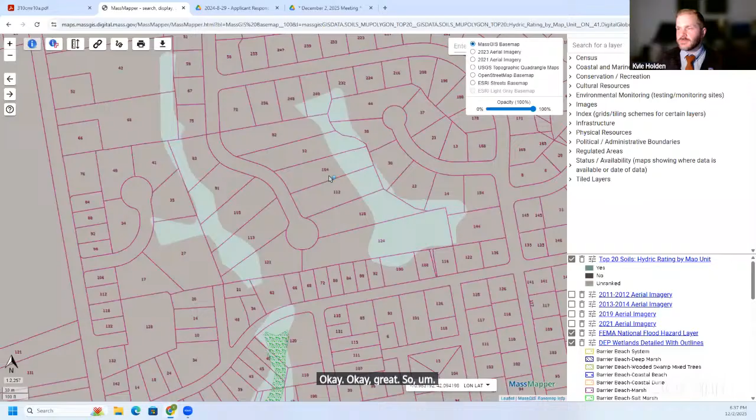I'm going to share my screen. This is for the notice of intent application for the subdivision as a whole, rather than each individual lot, but it does show the lot lines, roughly where the road is, and most importantly for us, where the wetlands are. Does this map show the MassMapper map? That is MassMapper, yeah. Okay, great. So this kind of shows broadly where we're dealing with.

Initially, we're looking at this entire lot as the lot that's being developed. Several individual lots now, but it was one large wooded area to begin with. These blue areas are roughly where the wetlands have been delineated. There's one wetland system that goes up north-south through this way, and a second wetland system over on the east side of the whole larger lot.

The fences have been installed on 91, 105 Debbie Road at least. The concern is the fencing that was installed is a solid vinyl fence that does not allow wildlife to potentially traverse through the fence line.

My concern and what I'd like the commission to weigh in on is we have - I'm going to switch back to the plan set now - the wetland system here to the left, and then the one all the way over to the east, and then all these homes that are going to be built up in between.

The concern is if we have fences similar to the ones currently installed at these 2 lots, all the way down through this area, any wildlife in this protected wooded area won't have a mechanism to get over to this area, and that will impact what types of critters can even survive and reproduce and thrive in these areas. One of the interests the commission is tasked with protecting is protection of wildlife habitat. That's just definitionally in the act.

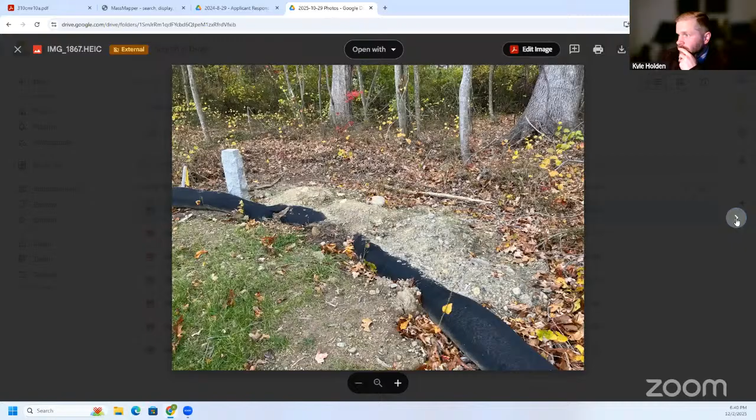The fencing that's within the buffer zone is within the jurisdiction of the commission, and the commission can weigh in on what they think is appropriate. That's kind of where I'll leave it open for discussion.

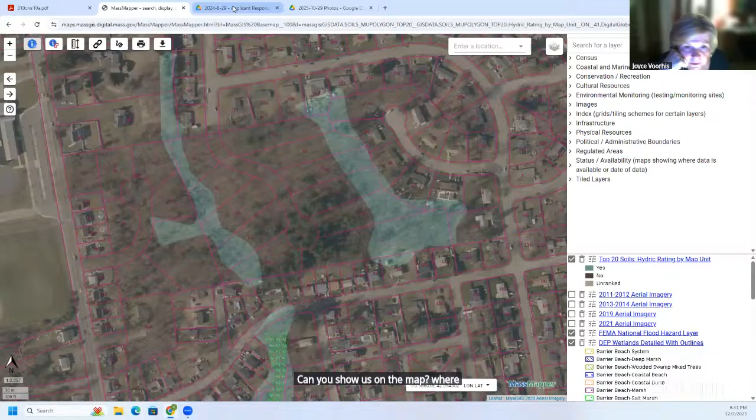I can share some more photos, but again, Commissioner Voorhis, Talbot, and Matt have been out in person at this site. Can you show us on the map where the fence goes? How deeply into the buffer zone does the fence go?

It's kind of hard to say because we don't have an as-built that includes the fence for any of these. I think we were looking at this home here and this home. So really, the back of the fence would definitely be within the buffer zone. A lot of these homes are far enough away that any fencing near the road or near the home itself is kind of outside of the commission's jurisdiction.

So there is limited capacity here, but at minimum the commission needs to weigh in on whether these fences are fine, because they weren't included in that notice of intent submission originally, but they're there now and they're asking for these certificates of compliance, or they ultimately will be. So before they construct fencing along the entire subdivision, I thought we should have this discussion, so we can give some guidance to the developer on what we're looking for here.

So the first lot had that fence. It didn't close out the back of the yard because there's not much backyard outside of the 25-foot buffer zone here. It went along this property line and then connected to the home. But then this home decided to build a fence—there's one along the property line here, and one along the property line here. That closes up by the home, and then there's that chain link fence across the back.

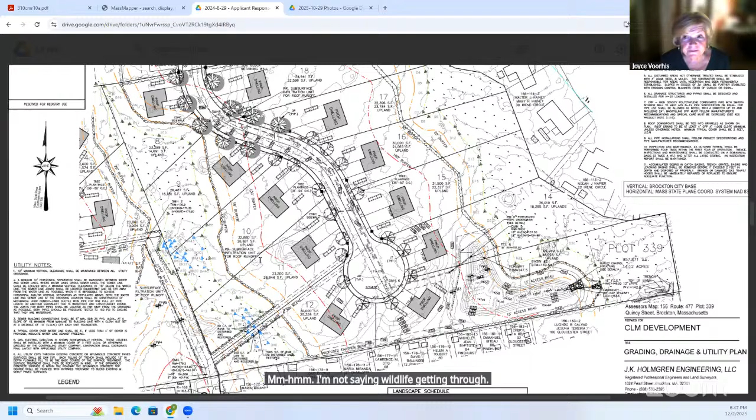I'm not seeing wildlife getting through those privacy fences if they're boxed in the front and on all sides at all. Madam Chair, may I ask a question to piggyback off of Peggy and Kyle? You can help too. The non-jurisdictional properties, they can put a fence up and close in their front, correct?

There may be other issues with that, like zoning concerns, or building code might dictate how high the fence can be. But as far as the commission's concerned, if it's outside of our jurisdiction, not within the 100-foot buffer zone, and it meets other standards for building within the city, they can do whatever they want.

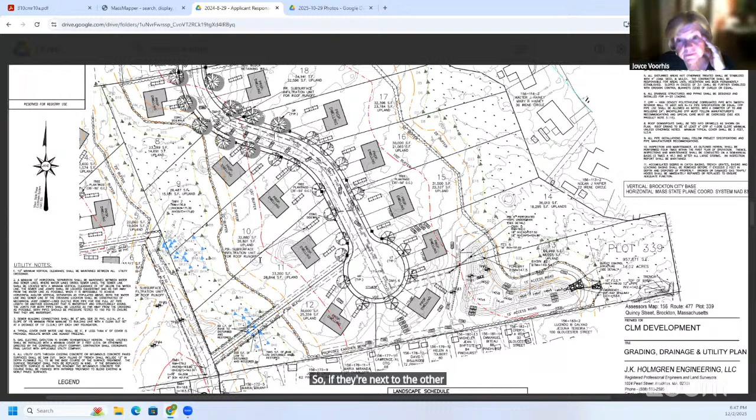So if they're next to the other wetland but not close enough to that wetland, outside of that 100 foot, they can put anything up that they want, even if it's going to box in the wildlife coming from the other side.

Yeah, so let's look at this lot, lot 17. I'm not sure what the street address is. This is one where we did not have an individual notice of intent for the construction of the home, because all of the construction associated with the home is outside of that 100-foot buffer zone, which is this red line back here. They could put a vinyl fence along this 100 foot and basically be outside of our jurisdiction. We couldn't weigh in on that at all.

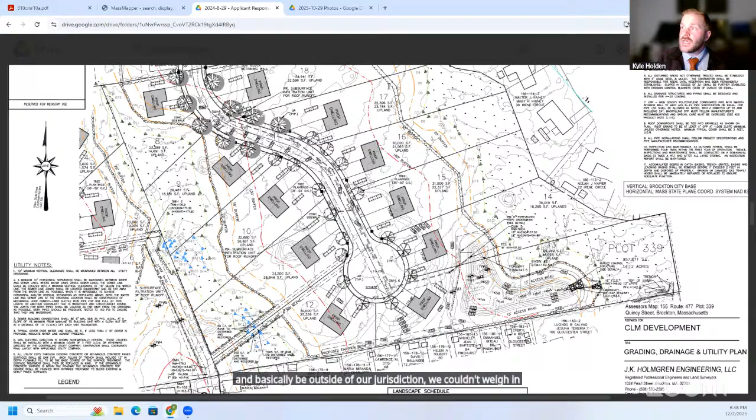But if they wanted to go all the way back to where the lot was cleared, which is close to where the 50-foot is, and it's something beyond like a post and rail fence, they would have to file with the commission in some way.

Which is why I think a development-wide fencing protocol makes so much more sense. I don't know, but whatever.

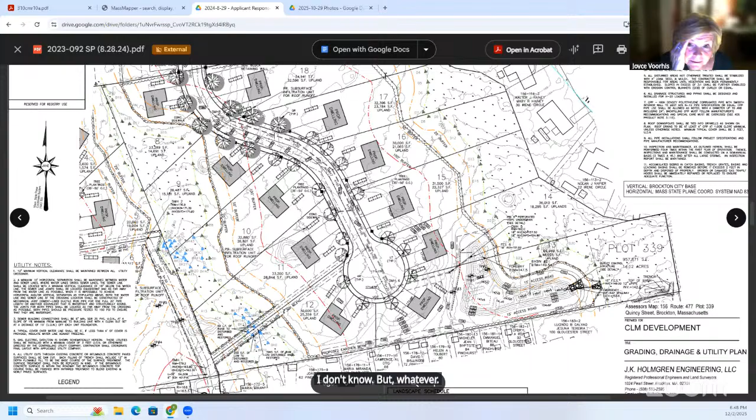So Justin, what do you think about that? Well, that was where I was going. Excuse me, Madam Chair, like Sharifa said, if we can't do anything with that, at least we could do a post and rail in the back that gives access out, not across.

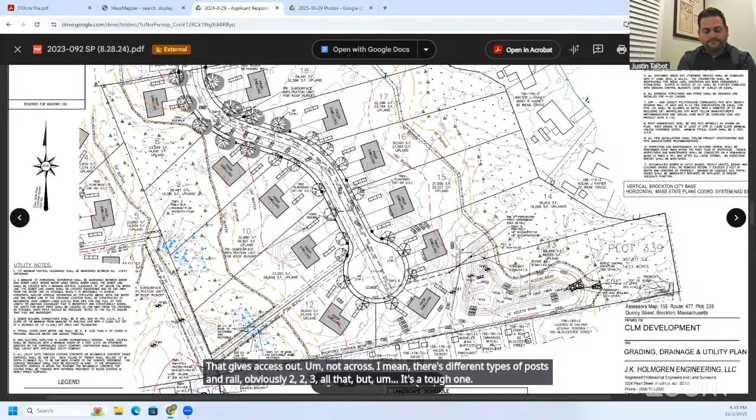There's different types of post and rail, two, three rail, all that, but it's a tough one. I wonder if we could do post and rail back and front. But we couldn't do the front because that's beyond the 100 foot. We could request that they put a post and rail fence in the front if it's outside the jurisdiction, explaining the commission's reasoning for that.

But there's no enforcement. Yeah, because it does say a barrier to wildlife movement is a critical requirement. The fence design cannot create a solid barrier that prevents animals, from rabbits to deer, from moving freely through the landscape. That's just to qualify as a minor exempt activity, which wouldn't need the commission's review. The commission can absolutely permit a solid vinyl fence within a buffer zone, but that needs to come before the commission. The commission needs to weigh in on that one way or the other.

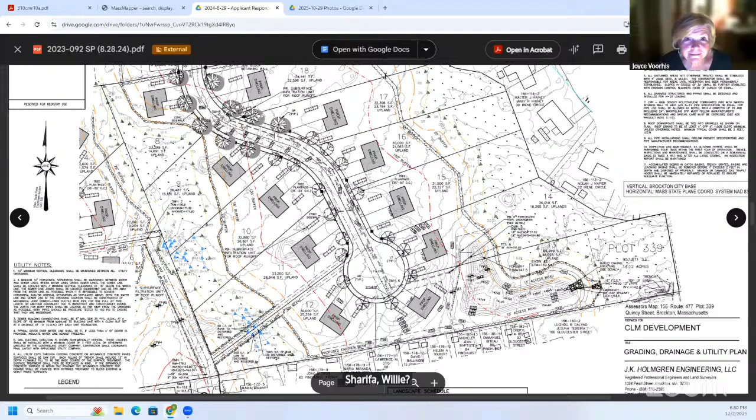Commissioners? Sharifa, Lily, Peggy? Yeah, I'm not sure. Outside of the split rail, that's the only thing I could suggest.

Yeah, but it again sounds... go ahead Lily, sorry. No, sorry. I was just gonna say it sounds like from what we have jurisdiction over, especially the back part of it closer to the wetland line, sounds like we should decide on that, and we could do what Kyle suggested, ask them if they are willing to change the front ones to post and rail, but we can't enforce it, we can at least ask. But we can enforce the one close to the wetland line.

So I think we should decide if that's what we want to do, that if they want to put a fence in the back part closer to the wetland line, it be a fence like a post and rail or something that's not going to impede wildlife. With the understanding though that wildlife need to have movement from one wetland resource area to the other, right? So yeah, kind of need it both front and back throughout the subdivision.

We can do our best to explain that reasoning and why we're making the request for the front fence, but like I said, it's not in our jurisdiction, but we can do our best to explain to them why. Maybe if we can explain it in a good way, maybe they'll understand and change it. But they might decide to change it, but who knows, the next owner that lives with it might decide to rip it up and put in a vinyl deer fence around their hostas. Yeah.

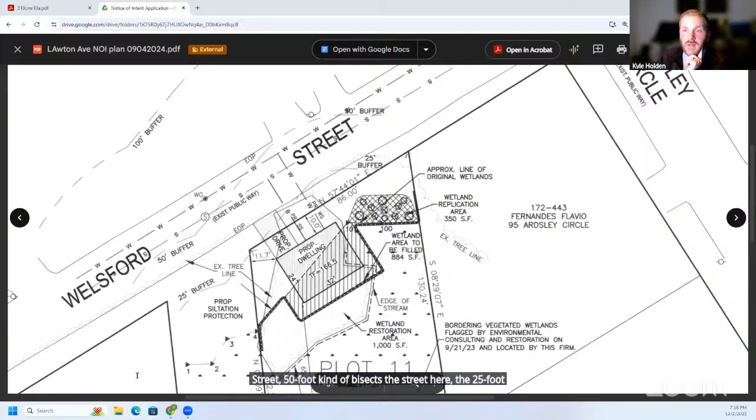I want to kind of refocus, and I think, if you'll give me a moment here. I would appreciate that very much. So Glenn, I appreciate you kind of talking through that proposal. That was not really what I thought we were going to be discussing here, what the ask of the commission was going to be tonight.

Based upon our previous discussion, I thought we were talking about basically the May clause and whether or not this project is something that the commission will ultimately approve, or if it's not worth going through this back and forth between yourself, the engineering firm, and our consultant, PARE Corp, in developing something that meets the standards, if ultimately the commission's not interested in permitting something that has the footprint of the building within like 3 feet or whatever of where the wetland restored line would be.

The proposal that you're talking about, and please correct me if I'm wrong, Glenn, is a way to augment, mitigate the existing habitat of the wetland that's been impacted by the fill. And as you mentioned before, kind of in this area to the north of the plot text between that and the area that's filled, Glenn's talking about excavating more material out of here, and I think creating a deeper kind of pool in this region. Is that correct, Glenn?

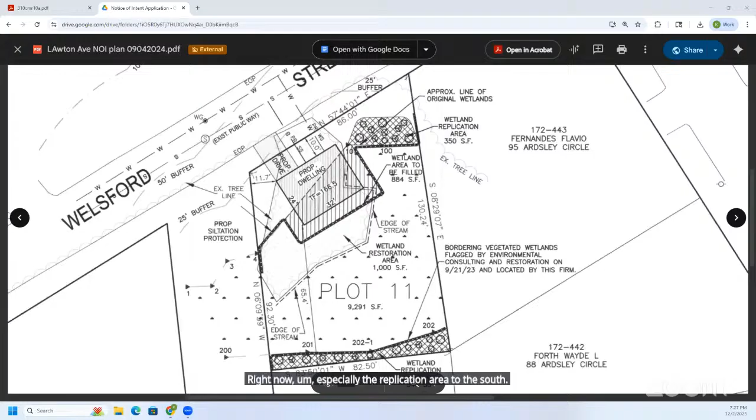Moving on from that, I think the replication areas -- I have some concerns over the constructability of what is shown right now, especially the replication area to the south. There's no construction access currently shown. The two options I see are through the neighbor's yard or through the right of way, both of which are limited for different reasons.

For the neighbor's yard, they would have to sign on to the notice of intent, and the applicant would have to get permission from them to access that wetland replication area. If they go through the right of way, there will be additional impacts to the BVW that aren't shown here, requiring further restoration work just to access this replication area in order to construct it.

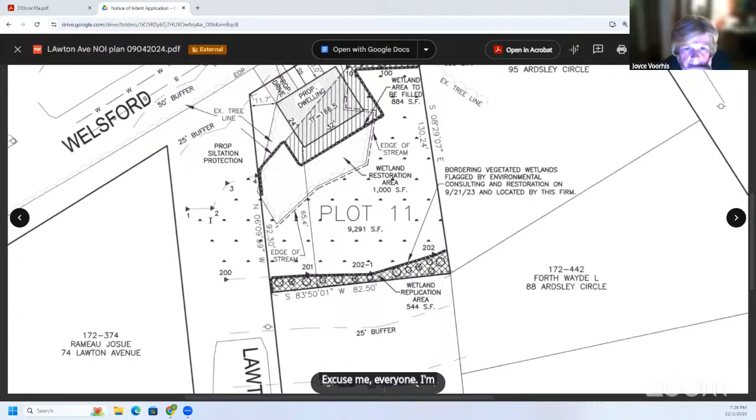One second, Kyle -- can you show on the map where the right of way would be? The right of way is this street-looking area, running through the wetland Greg's referencing. It's kind of cut off here, but this is 79 Lawton Avenue. There's a home constructed on this lot, and their yard basically goes up to the lot line here. Then there's a fence, and then a pretty steep drop off into the wetland area back here.

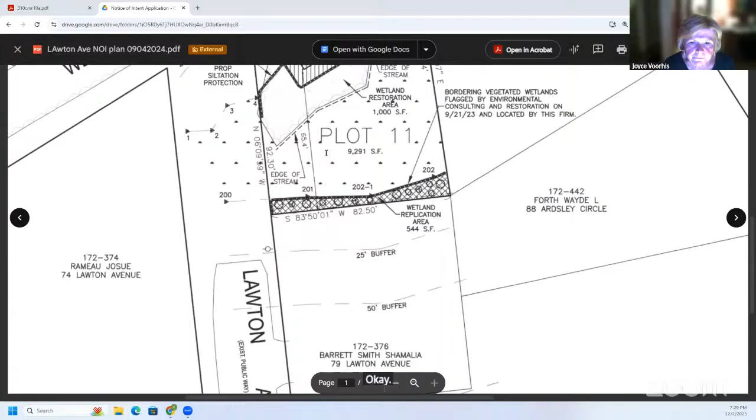Okay, thank you. That gets into my other concern about constructability. The wetland is probably a few feet lower than the adjacent yard area. So if they're going to do any sort of slope down from that yard to the wetland as a side slope to get down to the replication area, it's likely going to take up most of the width of that replication area.

Generally, slopes for replication areas shouldn't be much higher than 3-to-1. So just so the commission understands, that means 3 feet out for every 1 foot drop -- to get down 2 feet, you have to fill in 6 feet. So it quickly becomes a much smaller replication area, which is my point I'm trying to lay out to you.

I think a thorough cross section and summary on constructability of that replication area would be very beneficial for my review, and for the commission's review as well, just to see if it is constructible at all.

Because if they can't replicate in that area, the whole project, outside of other potential mitigation opportunities, becomes questionable quickly -- because no matter what other kind of mitigation work you do, you have to replicate 1-for-1 for lost wetland. There cannot be a reduction in BVW on site. So those are two of my bigger concerns.

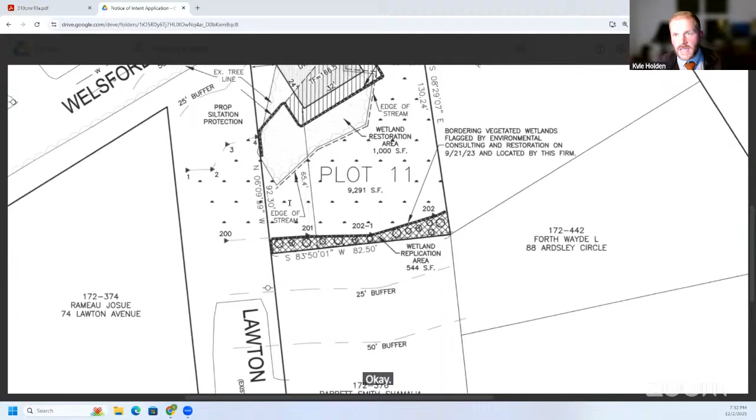That's great, that's great. Thank you so much. Thank you. Thank you. Thank you.

Glenn Kowalski, one point, if I could, through the chairwoman. We will ask JK to give us accurate topo on this plan, if we can get that prior to the meeting, just to make it clearer on the steep slope, as the consultant was just mentioning, across the wetland.

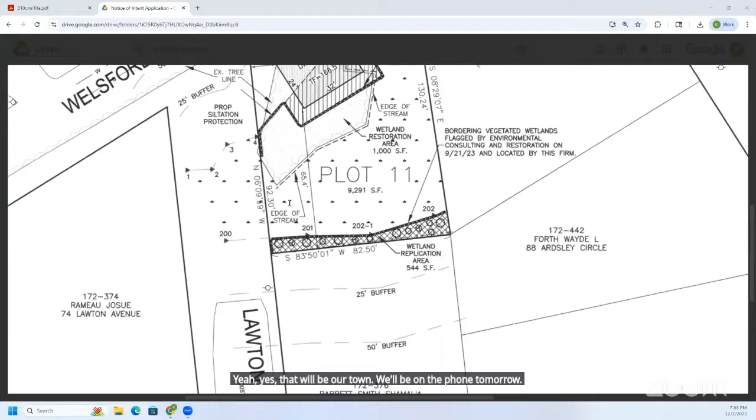To our being able to get to the visit, you mean? Prior to yes, that will be our attempt. We'll be on the phone tomorrow. We'll be on emails tomorrow to see if we can get the topo dropped onto this thing. That would be great, thank you. Okay, thank you.

Okay, so then I assume we need a motion to continue? We request a continuance from this side. Thank you.

I make a motion to continue this to 0 Lawton Avenue to the December 17th meeting. I'll second that. Motion's been made and seconded. Roll call vote, please.

Green, aye. Matt, aye. Excuse me, Talbot, aye. And Voorhis, aye. Peggy, are you available? Well, four - we still have quorum, right? Yeah, I think that'll be fine, Madam Chair. Okay, thank you. We'll say Peggy abstained. Okay, and that motion carries.

Okay, that was interesting. Thank you very much. Appreciate your time. Thank you.

Bye-bye. Okay, next on the agenda is number 11985 Belmont Street Car Wash. This is a notice of intent, right? Yes, Madam Chair.

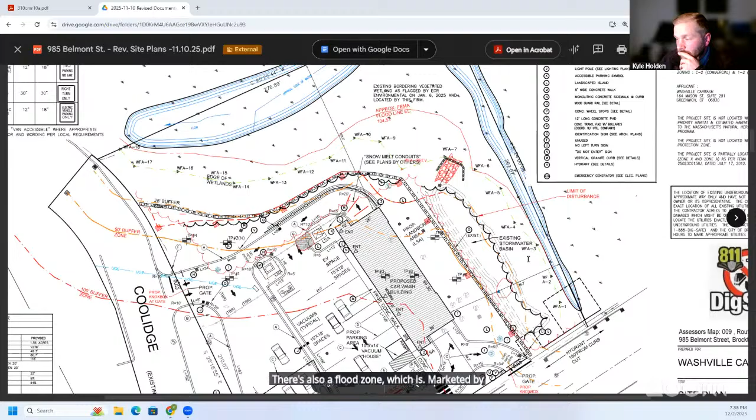I just have a couple questions, and either Spencer or Scott can chime in as we go through here. So what are these thatched square icons along, not necessarily the limit of work, but the erosion control barrier through this area? So Kyle, those represent symbols for conservation posts, for lack of a better term. For all limit of work posts. Great, thank you.

I know that there's been some conversation amongst Brockton as to what you were requiring prior to tonight. I'd like to suggest, if I could, other towns like Easton, for instance, and I believe Stoughton's another good example, but Easton requires that you put up 4x4 posts with a medallion on it. So there are other things that other towns in the surrounding areas use that are a lot cheaper than granite posts, which I think was something that was installed on that Charlie Macy subdivision that came up earlier in the evening tonight.

So just to kind of jump in there, Scott. Yep. The commission is looking at these on a site-by-site basis, right? So the concern of encroachment in a commercial facility like this is a lot less than that of a residential area, where people are mowing an extra foot into the wooded area every year, and then 5 years later we're right into the wetland. So I think the commission could certainly, we've done for another car wash development over at 710 Oak Street, something very similar, a little placard with just a kind of stainless steel pole there, and I think something like that would be appropriate for this as well, rather than the granite curb or the granite signposts.

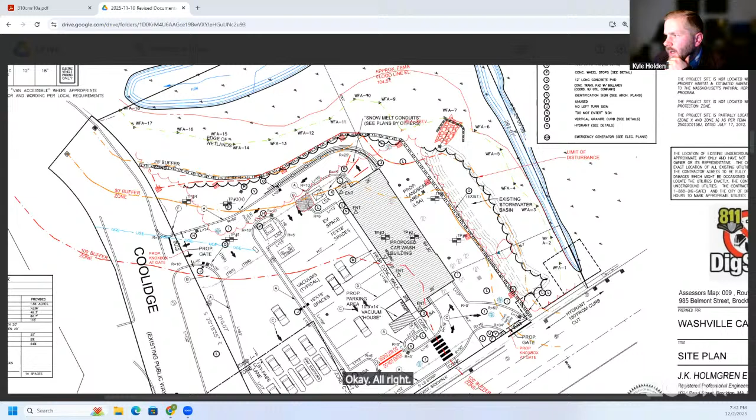That riprap is pretty much at the wetland line there. So we agreed with PAR when they said we should provide some additional protection for that riprap apron. That's just during the construction phase of the project, correct? The installation of this erosion control. Yeah, it would be removed after construction was complete. That line through here that looks like little Lego blocks is the proposed erosion control along here.

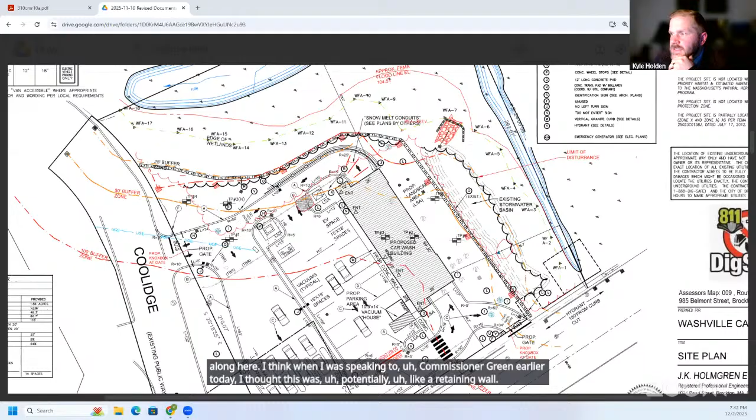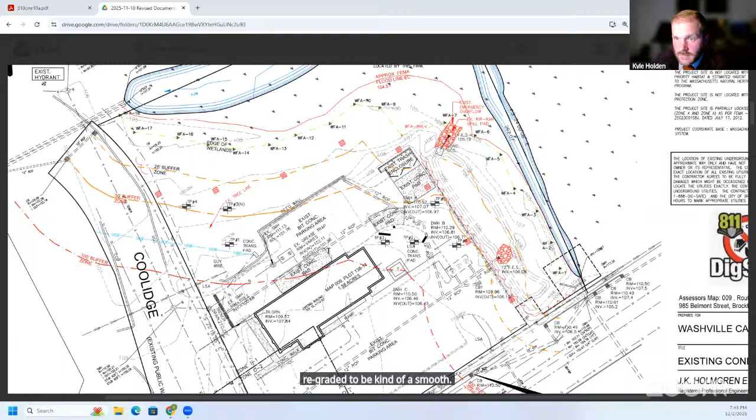I think when I was speaking to Commissioner Green earlier today, I thought this was potentially like a retaining wall. There is currently a retaining wall on site, and I'm going to pull up the existing one. That will be removed as part of the project and regraded to be a smooth grade change from the developed area to the buffer zone. Is that right? That's correct as far as that existing retaining wall, but there is a small retaining wall proposed.

If you go back to the site plan, Kyle, if you don't mind. Is that for the cars to be able to go around? You can see at the exit of the car wash, there's a drive, an exit where you leave the car wash, then there's the curve and the straight section. There'll be a guardrail and a small section of wall in there.

What is a snow melt conduit? The intent is that there would be underground conduits, underground heaters if you will, so that if there was a small snow event, the snow would melt in that area. That is the exit, right, to the car wash? That's the exit, correct. Yes. Okay, good, thank you.

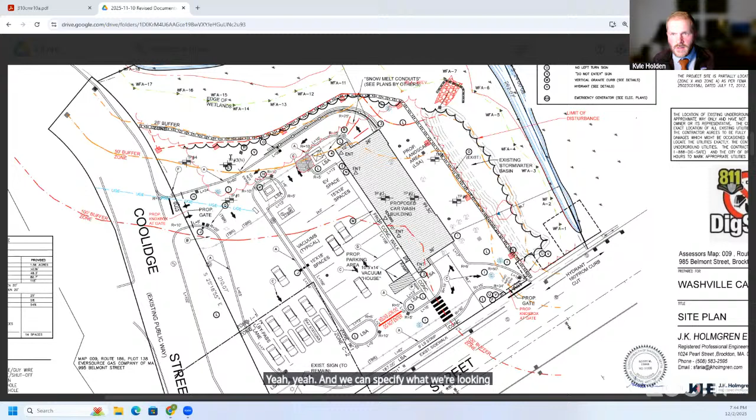Kyle, I just wanted to add something about the existing basin. We did have a request that Scott and his team model that basin in its restored state and then own that basin's continued maintenance in the operation and maintenance plan along with all the proposed BMPs. As far as our review extends, that was taken care of. I believe they're also coring a new invert in the outlet control structure, because of the added flows and the change in flows. That's correct. So I just wanted to state that all that was reviewed.

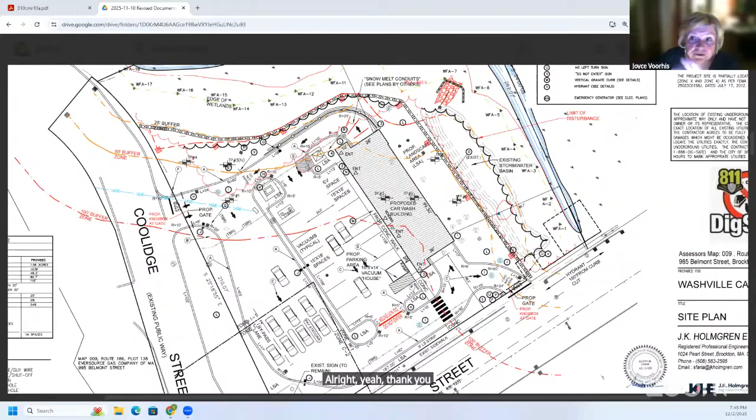Go ahead. The snow conduit, is that where you're going to be plowing the snow, or where will the snow go when you're clearing the parking spots? Yeah, no, that's not where the snow storage would be kept. I believe on the site plan there is an area designated for snow storage. Could you bring the map up, Kyle? Yeah, I'll pull it back up here, Scott. Thanks.

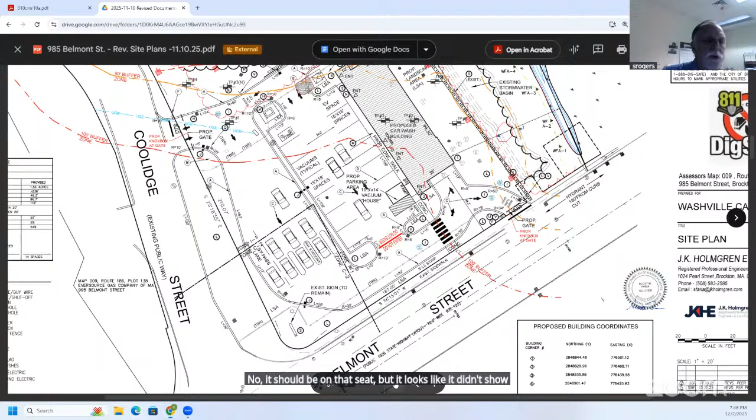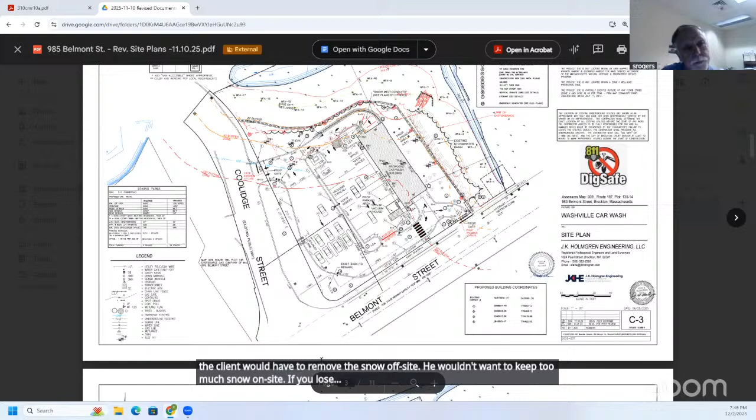Would it be on this sheet, Scott, or is it on a different sheet, do you think? No, it should be on that sheet, but it looks like it didn't show it. So we could show it on a plan. Probably what would happen is we would show an area within the parking lot, but it would only be a certain amount of cars. Typically, when you get bigger storms, the client would have to remove the snow off site. He wouldn't want to keep too much snow on site. If you lose parking or vacuum space, it's loss of revenue.

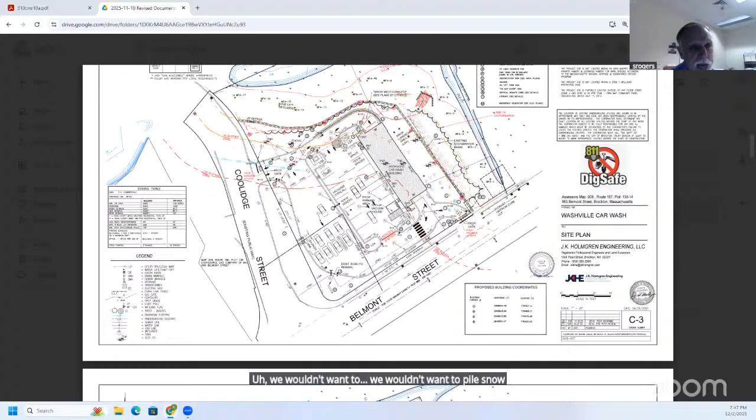Scott, would the area that didn't make it on the plan be in this portion? The commission could potentially ask that if any storage of snow is done on the site, it be outside the 100-foot buffer zone. Yes, Kyle, the area you circled is probably the area. The other area I could also suggest is up along Belmont Street and Coolidge Street, not on city property, but there are landscaped areas proposed. We wouldn't want to pile snow 6 feet high so you can't see anything or block visibility, but you could put snow in those areas as well. So I could add that to the plan if needed, or we could put it in the order conditions.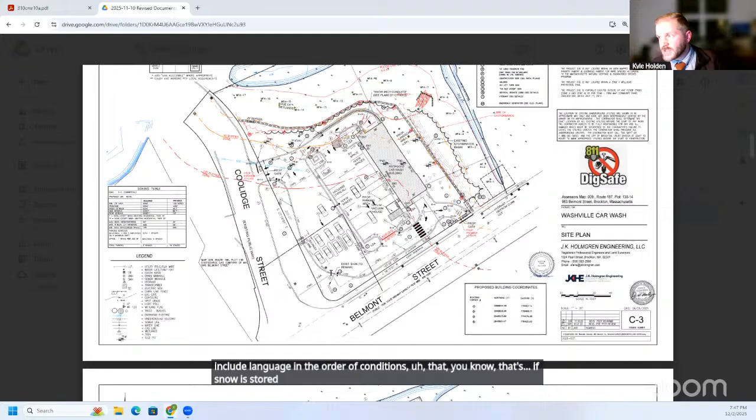Given that we're trying to move through planning board quickly, I don't think that revision is necessarily required for the issuance of the order. We can just include language in the order of conditions that if snow is stored on site, it be stored outside of the buffer zone. On subsequent plans put forth to planning board, which I'll review as well, I can confirm those areas are outside the 100-foot buffer zone. That shouldn't require an amended order of conditions from the commission at that point. That's perfect, good.

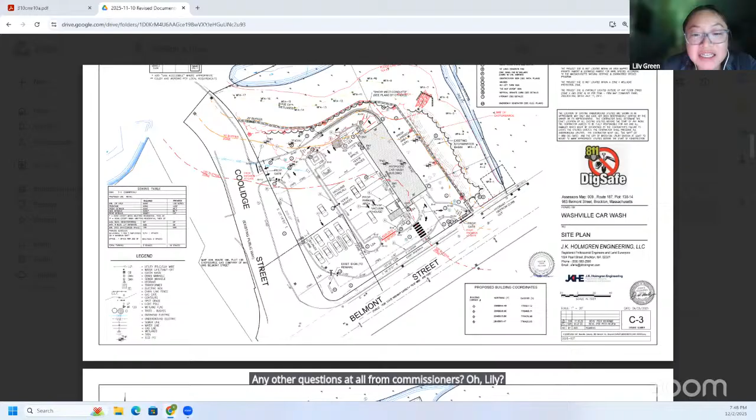Any other questions from commissioners? Oh, Lily, I have a question. The proposed landscape area along the side of the lot, I was wondering what the proposed landscaping is exactly.

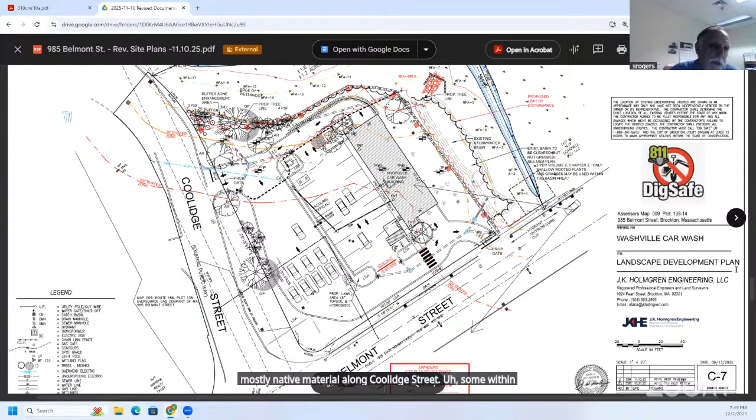We did do a proposed landscape plan, and as of right now we haven't gotten any comments yet from planning board or planning staff. But as of right now, the front areas along Belmont Street will mostly be lawn areas, and we proposed street trees and shade trees, mostly native material, along Coolidge Street, some within the parking areas, some behind the car wash building. We also proposed some buffer zone enhancement areas where Kyle's pointing out, and there's a rain garden proposed in that location, with some plantings within that as well. Nice, all right, thank you.

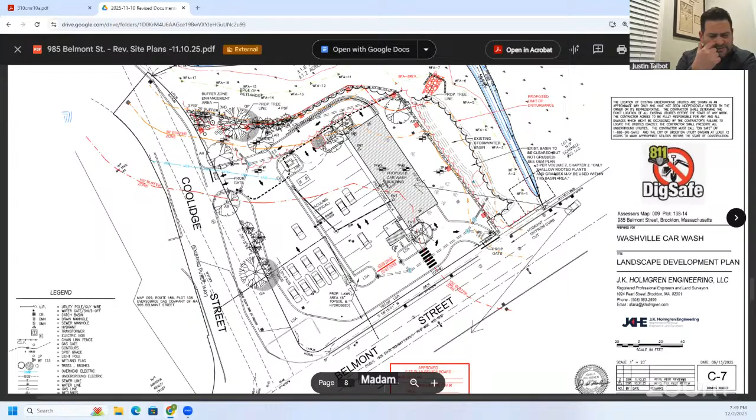Any other commission comments? Madam Chair, just a quick question. This is the existing car lot, right? Is this Avon Auto Brokers currently, is this that lot? Yes, correct, that is correct. But you'll raze that building completely, right, to do this, I'm sure. Completely removed, correct.

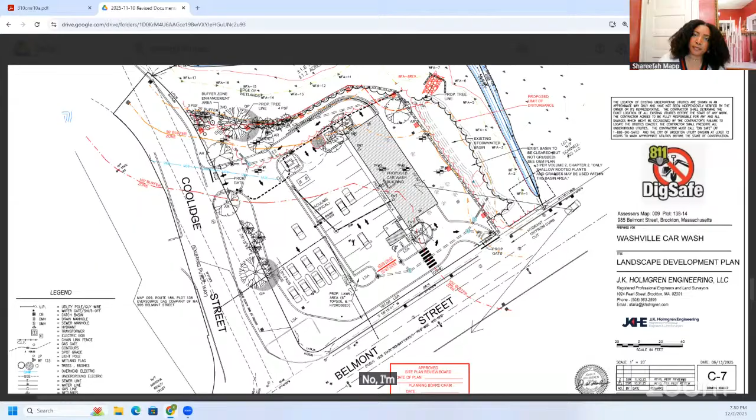Shareefah, you good? No, I'm good. Okay, no other comments or questions. Is there anyone from the public here that's asking to speak to this? I don't see any hands raised, Madam Chair.

Commissioners, what do you think? Are we ready? It looks good. Yeah, I do too. I have no other questions.

Okay, good, entertain a motion to close then. I make a motion to close. Are we issuing the order of conditions before closing? I think closing is just closing the discussion, isn't it? Yeah, Madam Chair, we close the discussion and then we issue. Okay, so I make a motion to close the discussion on 985 Belmont Street.

I second that motion. Motion's been made and seconded. Roll call vote please. Curtis, aye. Green, aye. Mapp, aye. Talbot, aye. Voris, aye. That motion passes.

So the next motion would be to issue an order of conditions with special conditions. There are the regular special conditions, is that right, Kyle? Yeah, and I'll include more specific requirements about what type of signage we're going to require, similar to what we asked for at 710 Oak Street, and then some special condition about snow storage. Okay, that sounds wonderful.

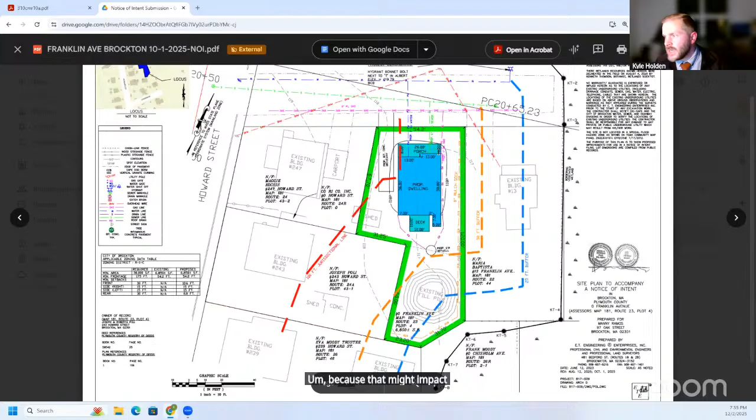Originally, the wetland delineation ended here at flag KT4. I asked them to continue the wetland delineation through this portion of the property because that might impact the buffer zone. We're still only within buffer zone here. We're not directly impacting any jurisdictional resource areas. So in general, we're ready to move forward.

The one thing I've got questions about from the commission is this fill pile back here. In similar developments we've just permitted recently, we've asked that the applicant remove historic fill as part of their development of the site. This fill pile was not included on the original site plan, and I don't think they referenced it in the narrative or anything. So I think the commission should weigh in on what's to be done with this, or clarify what the applicant's intention is. They're not here to speak about this project tonight. But my thought is, while they're back here doing all this work, they should remove the fill while they're here doing things, right?

So my question for the commission then would be, we have a 25-foot no-touch policy. We normally require those conservation markers to be installed along that 25-foot line. Here, as depicted, that line would kind of cut through this back portion of the property. I've got some pictures I can share with the commission about what this area looks like back here. The question is, do we want the applicant to provide a buffer zone enhancement plan for this portion that would then be separated from the rest of the development by a fence or some sort of marker through here? Or are we just content with them removing the fill and leaving this more or less as is, just putting up the markers as we would normally? So that's the question I have for all of you. I've got some photos that I took today that I can share with you.

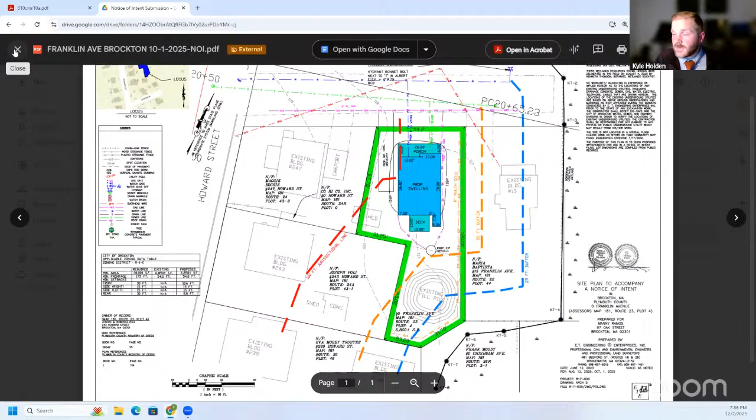The concern is, I'll go back to the lot, but the lot is very oddly shaped. It's not a nice, neat square. I'm not exactly sure where all the lot lines are. I imagine maybe the property line might go here. I don't know if this shed is part of this property or that one, but there's a whole bunch of different property lot lines scattered throughout here. Does it make sense to have kind of a weird fence just here, or not? Not really sure. Do you mean a fence or do you just mean markers? Markers, well, however.

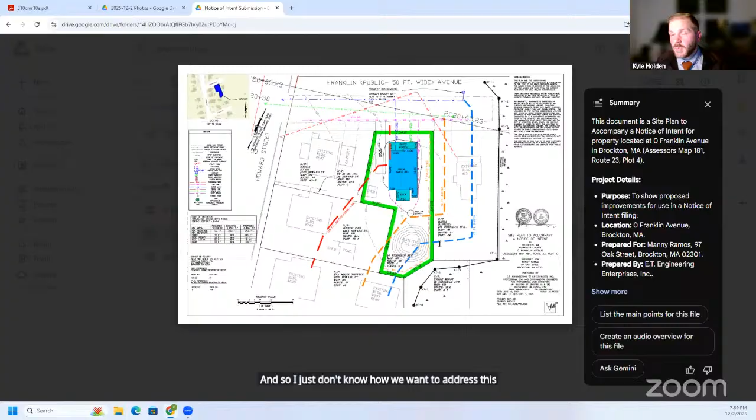I'm going to go back to that site plan again because the area in question is kind of right back here, between this existing building and the lot. So I just don't know how we want to address this. We should probably make that decision before we issue the order of conditions, whether we want a buffer zone enhancement plan submitted for this area that's within the 25 feet, within this lot, and leave the area that's currently just lawn over here as is, and this property as is, but focus on the area of this lot that we have jurisdictional authority over, where they're doing work now, or how the commission wants to move forward with that.

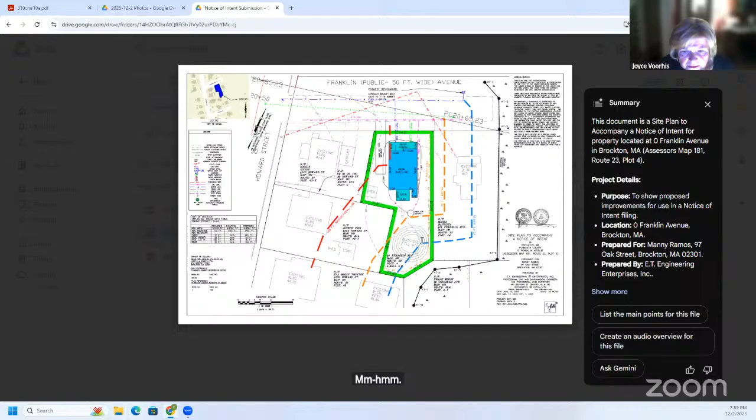Kyle, is the green line the limit of work? That's the property boundary. This is the entire lot, it's a weird shape. The erosion control barrier is this thin orange line on the down gradient side. It goes basically along this existing fence line and circles back over here, but doesn't continue all the way up here. The grade is sloping from the road down towards the wetland in this direction.

I have a question. I like the idea of the restoration plan in the 25-foot buffer zone, in addition to markers.

We would just want to get that restoration plan submitted to the commission before we issue the order of conditions. So if the commission would like to see a buffer zone enhancement plan submitted, I'll need to reach out to the applicant again. They can get that together for us, and maybe we can also ask them to include a narrative of what they plan on doing with the fill, or that can just be a special condition that we require the fill to be removed, incorporated into the buffer zone enhancement plan. But if that's something we want, we need to ask the commission or the applicant to provide that.

So would we continue till next month's meeting and ask for that in the meantime? Yes, if we want the buffer zone enhancement. If we just want the fill pile removed, we can incorporate that requirement as a special condition, and issue the order of conditions tonight.

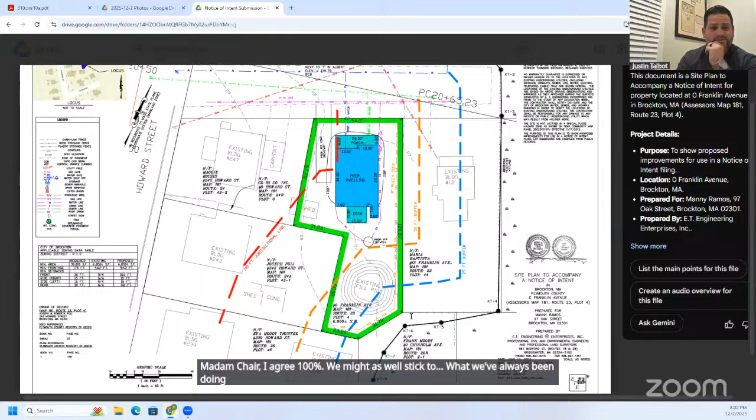Commissioners? I agree, I'd like the fill moved in the buffer zone enhancement plan for the 25-foot buffer zone area. I agree. Madam Chair, I agree 100%. We might as well stick to what we've always been doing with everybody else. We ask for the enhancement and they do it right, and it looks nice. Beautify Brockton.

I will convey that to the applicant, and hopefully they'll get that to us maybe even before the December meeting, but that will be the last requirement, and then we'll move forward with the order of conditions.

Thank you, I don't need a vote or anything other than we can just continue this to the next meeting. Entertain a motion to continue. I make a motion to continue 0 Franklin Avenue to the December 17th meeting.

With buffer zone enhancement. I second. The motion's been made and seconded. Roll call vote please: Curtis, aye. Green, aye. Map, aye. Talbot, aye. Voorhis, aye.

That motion passes. Madam Chair, I do see that we have a hand raised. I didn't notice that as we were going through the vote to close, but this is Lisa's iPhone. I'm going to go ahead and promote Lisa to panelist. I believe she would like to talk about the 0 Franklin Avenue file. Certainly, well, we have not closed it out yet, so that's good.

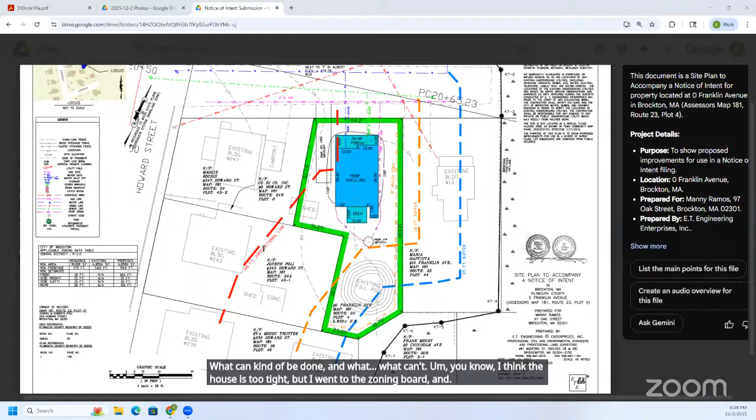Sure, just trying to get a grasp on what can and can't be done. I think the house is too tight, but I went to the zoning board and spoke my mind. I'm glad they're coming, and I'm glad you guys are doing a great job. I guess we'll see how it all goes.

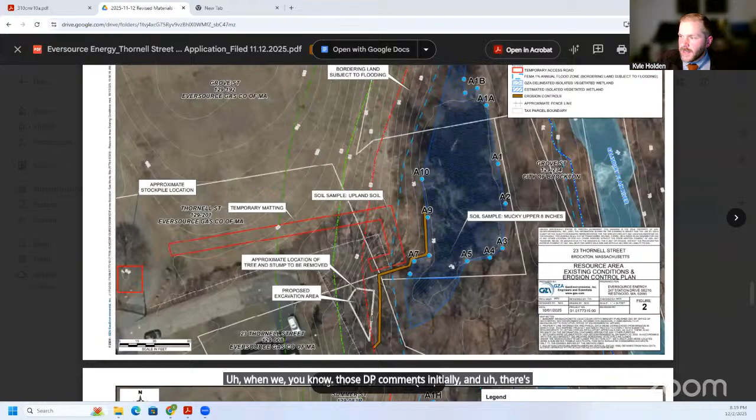So now that we have correctly identified all jurisdictional resource areas, the commission can move forward with the issuance of that order of conditions. I reviewed our discussion from last month, and there was one special condition being discussed at the end of that meeting when we read the DEP comments initially. There's one large tree whose root system will be impacted by the soil excavation here, and it is being proposed to be felled and taken down as part of this project.

Rather than just leaving that tree in the resource area or around the resource area, we can ask that it be removed along with the contaminated soils. I think that was part of the original plan as well, but we can just clarify that as a special condition in the order of conditions. Okay.

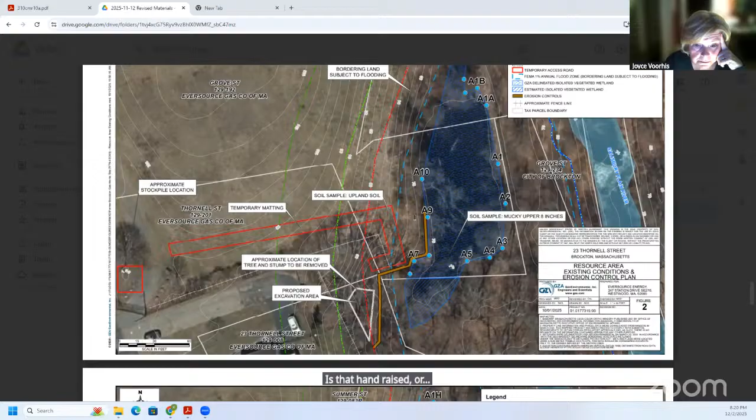Commissioners, questions at all? Is there anyone from the public that's... is a hand raised? Sorry, I'm very distracted here. I don't see any hands raised, Madam Chair. Thanks. Okay, good.

So then I entertain a motion, I guess, to close. I make a motion to close the discussion on 23 Thornell Street. I second that motion. Motion's been made and seconded. Roll call vote, please. Curtis, aye. Green, aye. Map, aye. Talbot, aye. Voorhis, aye. That motion passes.

Would someone make a motion, please, to issue an order of conditions? Yeah, order of conditions. Thanks. I make a motion to issue an order of conditions for 23 Thornell Street, with the special condition about the tree.

I second the special conditions outlined by Kyle. I second that motion. Motion's been made and seconded. Roll call vote, please. Curtis, aye. Green, aye. Map, aye. Talbot, aye. Voorhis, aye. That motion passes.

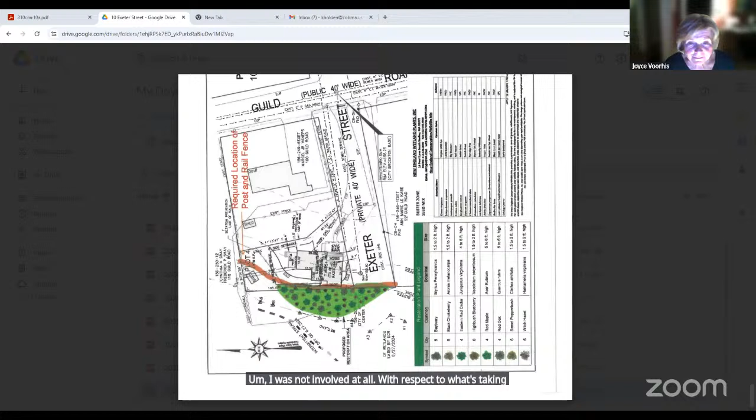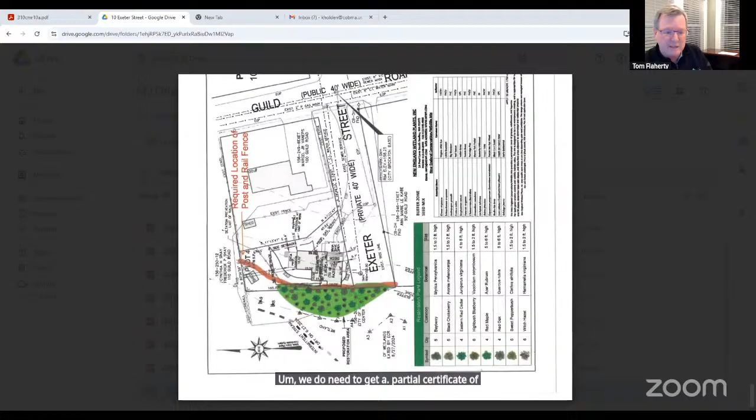I represent Carlene in connection to the sale of her property. We do have a buyer. We do need to get a partial certificate of compliance because I know this board is going to require 2 years of growth. Brad provided me with a letter, which I think was addressed to Kyle at the Conservation Board, indicating that the work has been completed. So he asked me today if I could jump on this call on behalf of my client.

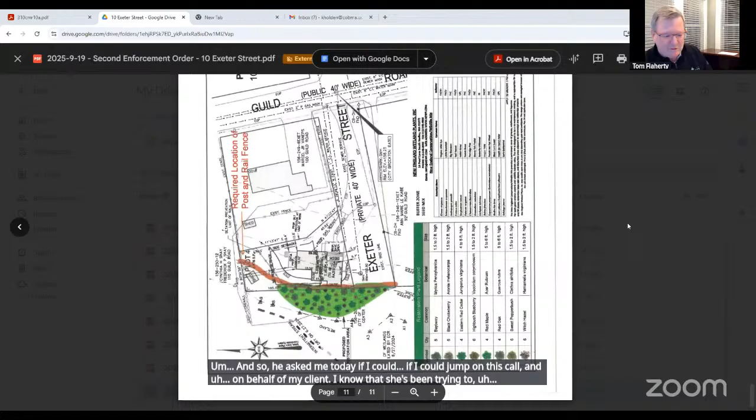I know she's been trying to sign in, and she's had some difficulty doing that. So obviously, we're here to do whatever the board requires. We do have a buyer, and they've been anxiously waiting to close. We can't close because of the outstanding order of conditions. We were hoping to get a partial certificate at some point to be able to close.

But of course, making sure we comply with the mitigation measures required by this board. I think, and Kyle, you can correct me, I believe those have been done, but it sounds like maybe not completely to your satisfaction. Maybe, Kyle, if you'd like to present now, go ahead and continue as you started.

Yeah, sure. Thank you, Tom. So this is one of the associated documents that I included in the second enforcement order, showing the intention of where this fence should be installed. Again, this is not actually a part of 10 Exeter Street, the property. This is a paper road. I think, Tom, I'm not sure if you're aware.

Is this a private or a public way? I don't know. As I said, I represent her as the seller's attorney, not the buyer's attorney. If it's a paper road, then under Massachusetts General Laws, she would own to the middle of the road as a direct abutter. That's if it's a paper road. I'm not sure. In any case, that's not a hugely important detail.

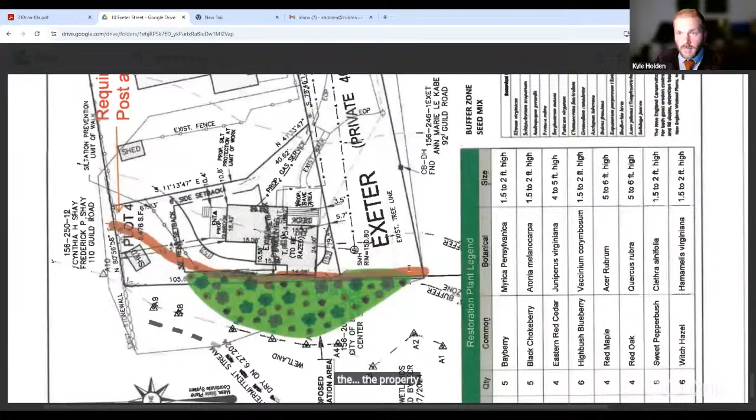So this is kind of what I had originally given to the applicant as far as the request goes. I was out at the site earlier today and took some more recent site photos. I think the fence is, again, my opinion - I'm kind of removing myself from this discussion as far as decision making. I'm kind of punting this over to the commission.

In my mind, conservation markers need to meet several criteria. They need to be a permanent marker - this is part of the order of conditions. It doesn't expire; this is not an expiring condition. These markers need to be in place for the length of, like, forever, right?

Not forever, but basically forever. So that needs to be a durable material. It needs to be constructed well, and it needs to stand up to the weathering and all sorts of things like that.

So I'm going to first start with photos that I took in November. I reached out to Caroline after I took these photos, and I think there's been additional work done since then. I'll also show you the photos that I took at the site today.

But most of my concerns - we can kind of see what's happening here. So this is the fence, again at last month. We required a post and rail fence to be installed. We talked about post and rail fences earlier as to why that type of fence is preferable, to not impede wildlife movement. But you can see here that there are nails sticking out of the fence.

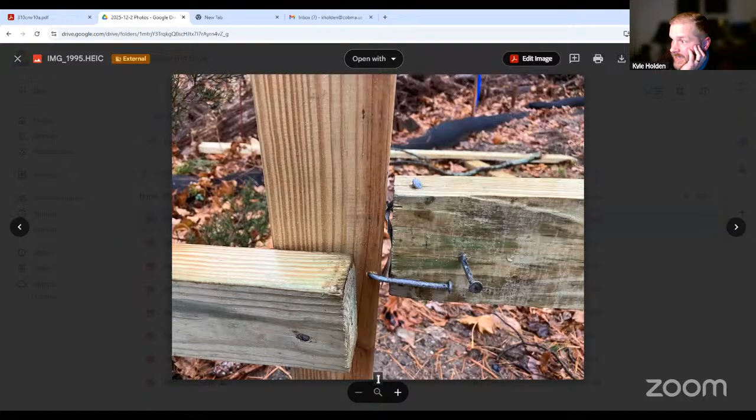I took this photo today. There are nails connecting these two beams, but this is a sloppy job. This is embarrassing.

This is supposed to be along the property line. This is a straight line. The property line between the paper road, the city-owned parcel to the left, and 10 Exeter Street is a straight shot. People install straight fences all the time.

This is again taken today. What are we doing here? This is pretty sloppy. In addition, this is a photo of material—concrete that's been thrown over the fence into the buffer zone enhancement area. There's extra construction debris here on the buffer zone enhancement area, and stuff thrown over here.

This is another shot I took. This is the foundation of the building as it comes really close to the lot line. It's hard to see, but there's a pretty steep grade change right through here, not stabilized at all. There's erosion through here. I'm concerned about the foundation getting washed out. This needs to be stabilized—it should have been done this fall.

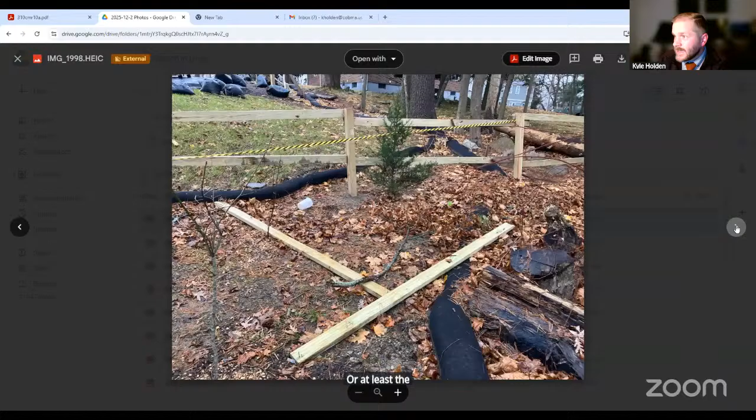The area closer to me is the only part of the whole site that's been seeded to grass, or at least the grass has taken. The rest of the area is just a muddy mess out there. This is the new erosion control that was put down, and it's already being overtopped by sediment rolling down this very steep, unstabilized slope.

Here's another shot. Generally, Tom, just so you're aware, these erosion control silt socks are considered functioning when the sediment buildup is less than 50% up through the height of the sock. So if this is a 12-inch diameter sock—I think this is more like a 10—say it's 5 inches of sediment on the up-gradient side, that's still considered functional. Anything above that, there's danger of overtopping, which is happening again.

So the erosion controls aren't in good shape, even though they were replaced recently. Here's more concrete, more construction debris in the restoration area. Here's that silt sock again, and that area that's very steep—probably the steepest portion of the site—with no effort to stabilize it at all. More concrete in the restoration area, and more construction debris beyond the limit of work.

Here's the back portion of the lot. No seed has been put down here. This is completely open, no site stabilization at all.

I don't think you guys are anywhere near ready to even apply for that partial certificate of compliance. The commission has been willing to work with other applicants on stabilization during the winter time, but something needs to be done here. It's really up to the applicant what is done—obviously you'd want to run that by the commission first—but this is not ready for a partial certificate of compliance.